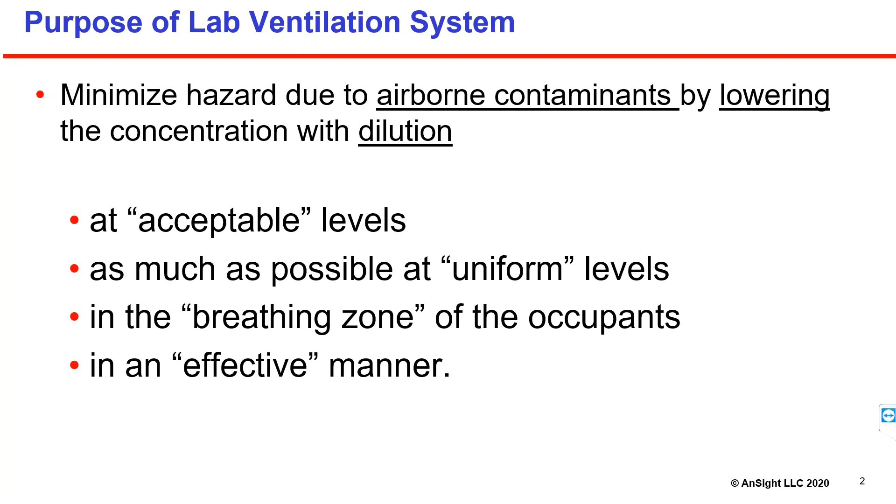So that's what I mean by effective manner. The key here is, even though this sounds very good, we really don't have any good measures to quantify this. Are we achieving the purpose of lab ventilation?

So let's go to the basics here. What is air changes per hour? You take the supply airflow rate, if you're doing in CFM, multiplied by 60. And remember, the volume of the lab comes into picture, the volume of the lab.

So if somebody says use 6 air changes for your lab, the design engineers take that 6 air changes, multiplies by the floor area and height of the space, and then finds what kind of air handler they need for this building. So when design engineers get that number, they don't think whether I need 6, 8, 4 or 3 air changes. That's what the codes and design guidelines specify, and we get that.

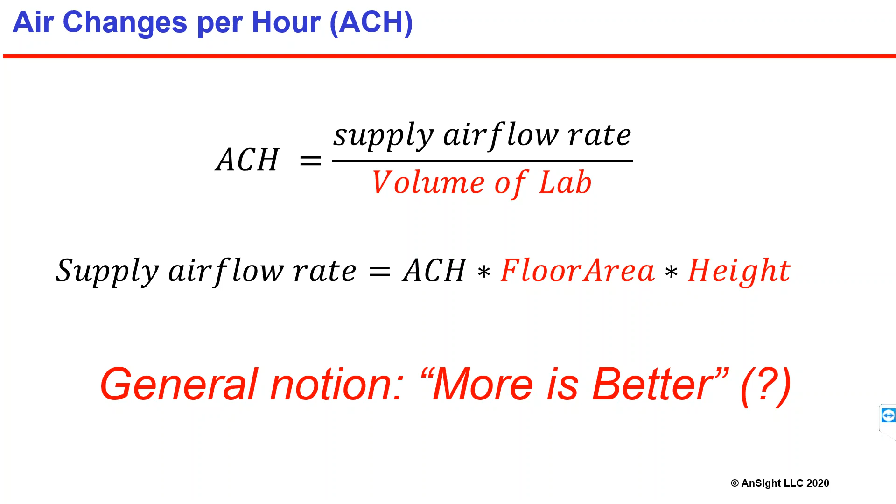So are those 6 enough? Are those 4 enough? So generally what I see around is more is better. If the code says 6, we are running our labs at 10 air changes because 10 is better than 6. Really? Let's try to find that out.

So here are some popular notions around, and what I heard from my colleagues and people I come across. High ACH can create well-mixed conditions. By the way, that air change rate equations and the dilution equations, they assume the space is well mixed. It's like you're putting a creamer in your coffee cup and stirring it well, so it's a homogeneous mixture.

Another thing, people think high ACH can create uniform concentration levels. Again, that goes to that mindset of well mixed, that if it's well mixed, then uniformly I can create similar concentration. High ACH can reduce chemical exposure risks. Again, more is better. If I put more air, more dilution, my exposure risk will be lower.

And then, not related to ACH really, but there is a notion that if I stick a sensor in my exhaust duct I can monitor the environment. I'm saying because I have a sensor, but your sensor is in the exhaust duct. We don't live in exhaust duct. Our nose is not in the exhaust duct. We live in the lab, and our critical zone is 4 to 6 feet high.

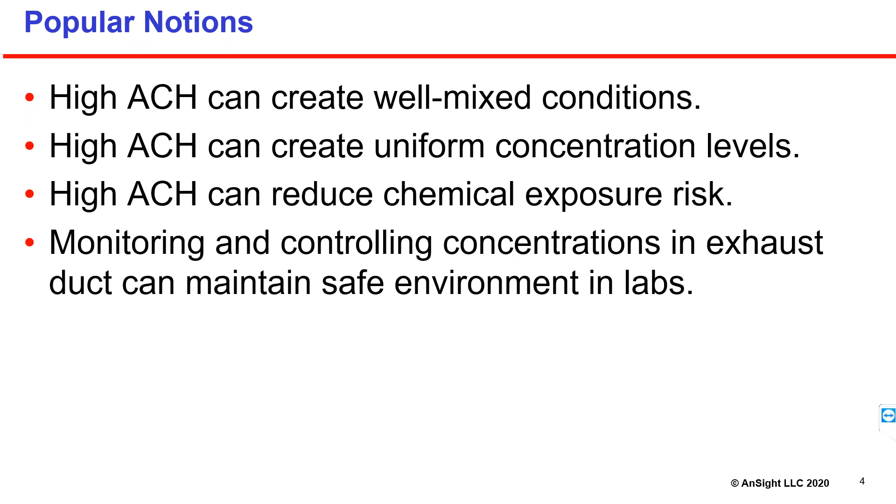Well, what are the factors that control the spread of contaminants in the space? Of course, the first thing is supply airflow rate, or you can call it air changes per hour. They are not the same thing, but they can have the same dilution effect, correct? The higher the supply airflow rate, higher air changes, it will give you a higher dilution.

By the way, only supplier flow rates control your dilution. Air change rates do not. Air change rates are required to control your purge and ramp up phase, and I will come to that. Rate of contaminant generation.

What type of contaminants are there? Where are they located? What is the rate of their generation or evaporation or something like that? Location and number and type of supply diffusers you are using, and location and number of general exhaust you have in the space.

If it is a fume hood dominated space, then how many fume hoods, what is their capacity, where they are located, and then, of course, where are the heat sources, where people are working in the lab space, and whether they are moving around and so forth.

And then finally the layout of the facility, how your furniture is laid out, where you are laying out your supply, what type of diffusers, and where your returns are. So these are different factors that can affect the spread of contaminants.

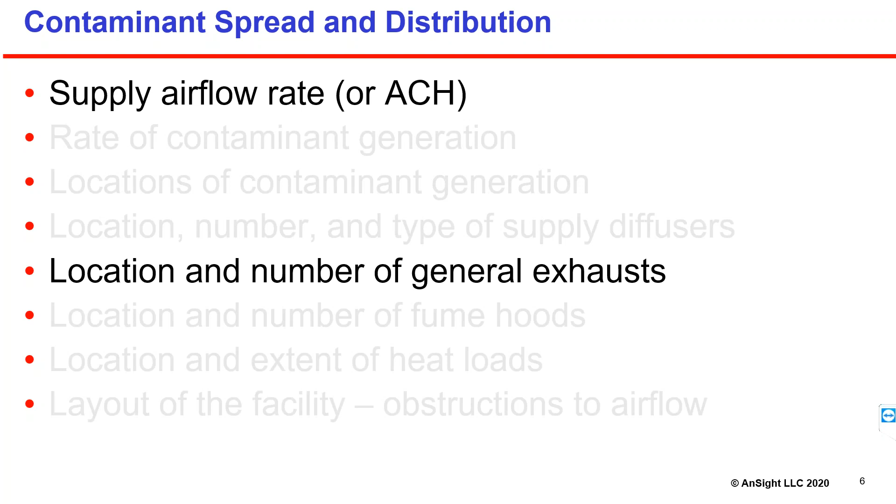What I'm going to concentrate on today are two parameters: the supply airflow rate or air change rate, and location and number of general exhausts. As I said, it's hard to quantify, and computational fluid dynamics helps us put a microscope on my lab space and look into the detail, where my concentrations are, where they are moving, how they are moving, why they are moving, and how can I compare design A versus design B versus design C.

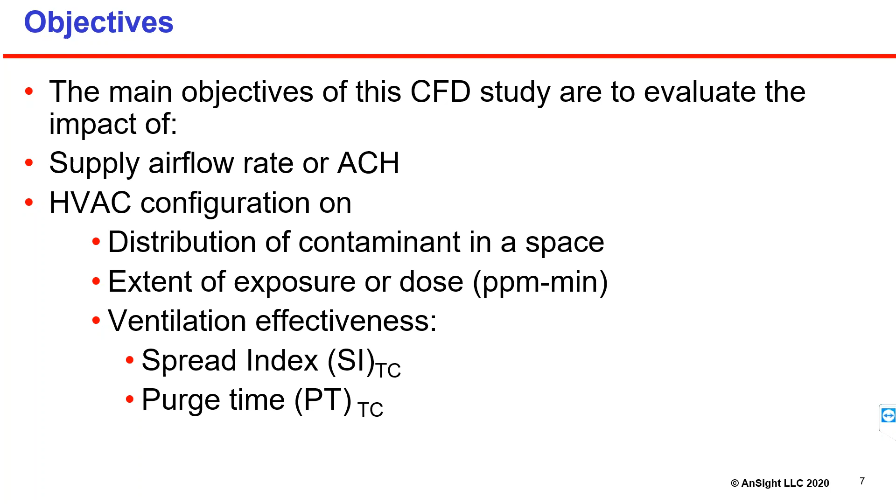I mean, all these designers and engineers can claim their lab is the safest lab. How can we quantify that? So I developed what I call the spread index and purge time, and I will talk about that. So here is the simple CFD model.

So don't look at it as, hey, my lab doesn't look like that, or I have 5 fume hoods in the lab. Those are all valid configurations. Just to prove my point, I took a simple configuration.

Think of this as a chemistry lab. There are benches here, and 3 researchers working here. Assume that somebody spilled a chemical here - this guy, person 2, did something and spilled it on the bench top.

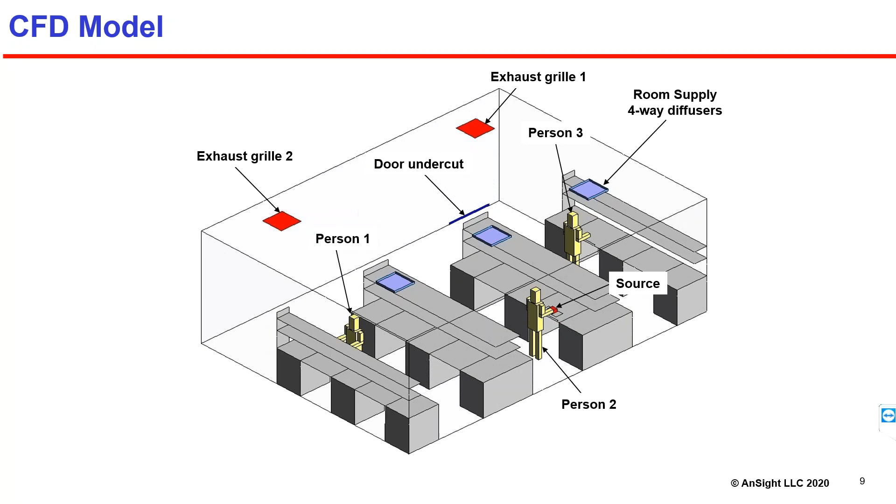For ventilation, we have 3 4-way diffusers in the lab over these working spaces, and then we have 2 exhaust grilles, as you can see here. Again, there is a door undercut, there is a door here. A simple configuration because we want to prove our point here.

This is about a 660 square foot lab. It's working at slightly negative pressure, that's why there's 100 CFM leakage bypass through the door. It's under isothermal conditions. Again, you may say, oh, what happens to the heat dominated lab?

Well, it can be different. The buoyancy can make a difference, and then your priorities will be different. If it's a heat dominated lab, you're more concerned about the thermal comfort of the occupants along with the safety of the occupants. So that's a completely different ballgame there.

Hypothetical release is 7 ml per second. Again, this is hypothetical, and let's say the whole liquid evaporates in 12 minutes, and we will run this analysis for 60 minutes. What we are going to do is run the exact same lab for 4, 6, 8, and 10 air changes and see what happens. Then I will show you 3 different configurations here.

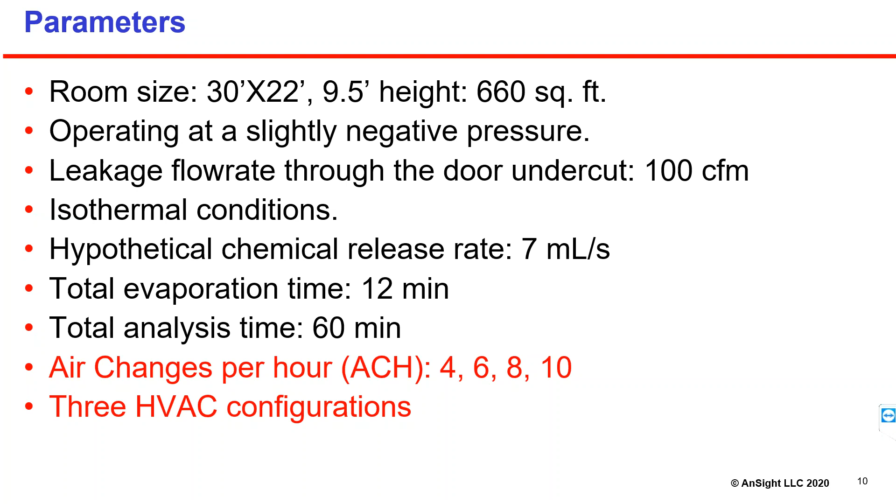First thing, airflow patterns in the space - with what is going on with COVID-19 now all over the world, there are so many things in the newspaper and LinkedIn and whatnot. Airflow pattern is the most important factor, it's the primary carrier of heat, moisture, and contaminant. So how air moves and what flow path air takes impacts the flow path of airborne contaminants.

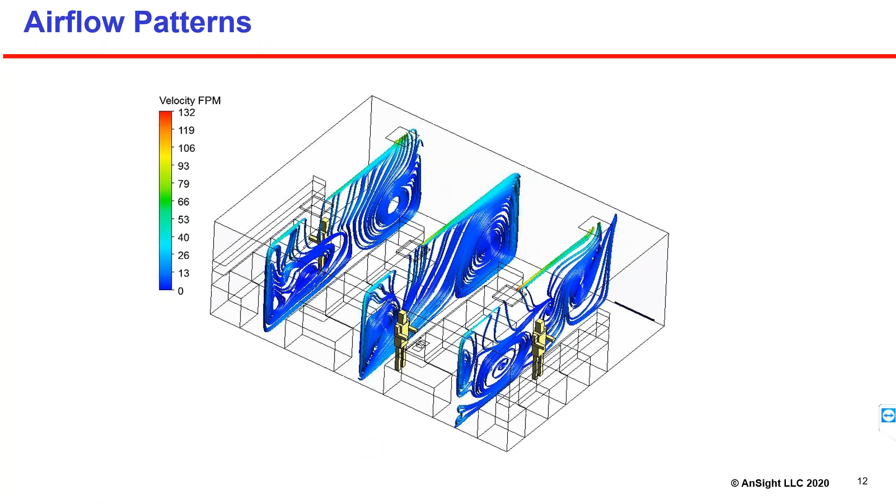Now, this is the key question. You take a snapshot in time, which I took after 12 minutes when my release of contaminant reaches its peak. And if I look at the air changes here, what you see - the first thing - is that the notion that higher air changes can create uniform concentration is a myth. It's not true at all. So no matter what you do, you will not be able to create uniform concentration in the space.

So throughout my concentration, I'm going to cap it at 25 ppm. It's arbitrary - assume 25 ppm is our acceptable concentration level. Again, that's arbitrary, you can have 5 ppm, or 10 or 50, whatever.

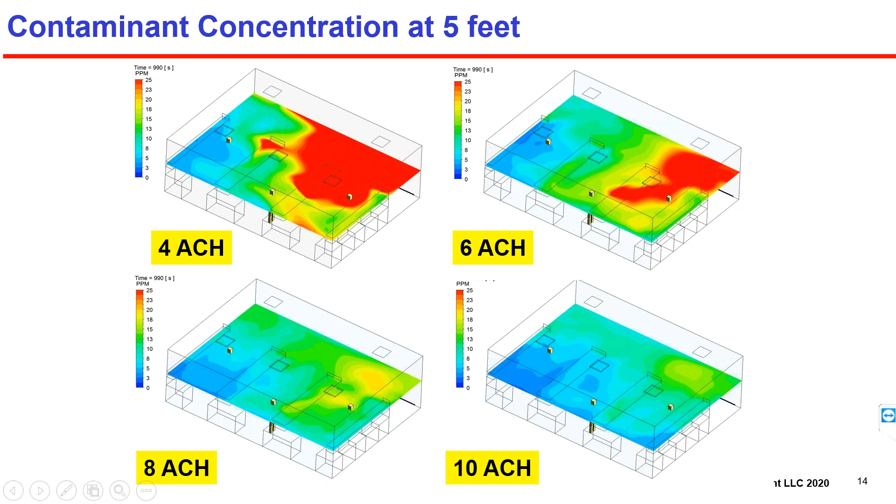So if we animate this and look at how it spreads with time, from the time of release until it fully evaporates, this spread is always smaller compared to this - this room with 10 air changes is purging much faster than the 4 air changes. When you will get full blue color, we are still at the yellow or green color here. So air change rates affect the rate of purge. That's a very important thing to note.

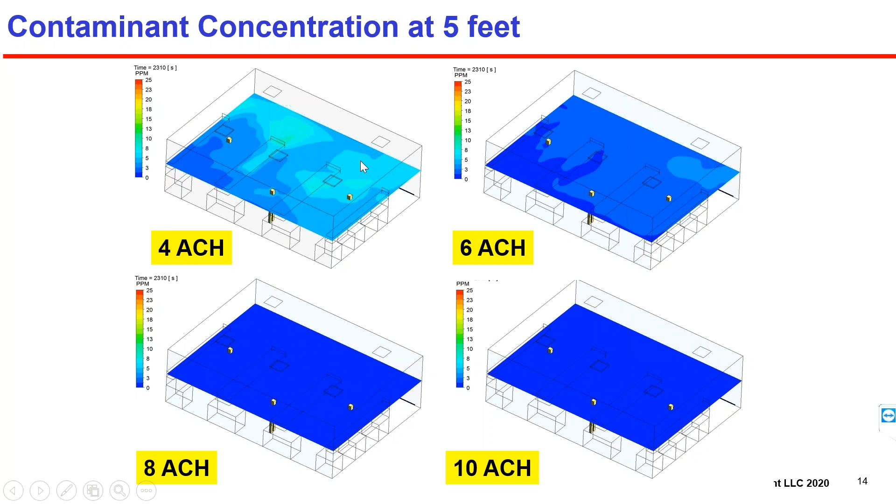Supply flow rate directly affects the dilution. You can see now this is completely blue, and we still have the shades of green and light blue there.

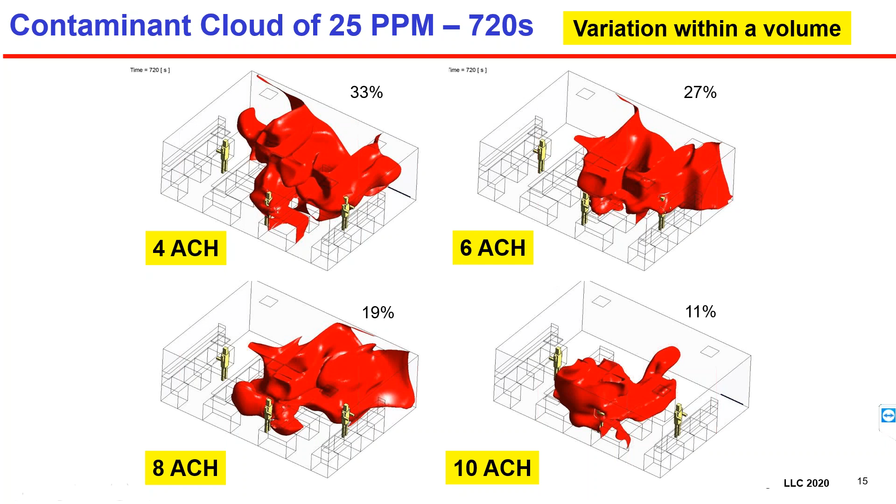So there's significant reduction when you go from 4 to 10. And this reduction, you will see, gradually diminishes, so you may not see a big difference between 8 and 10.

We can animate this to show actual propagation of this high concentration zone in the lab space. This is not possible to visualize by any other means than computational fluid dynamics. That's the beauty of CFD. This is a science based on the conservation of mass, momentum, and other equations.

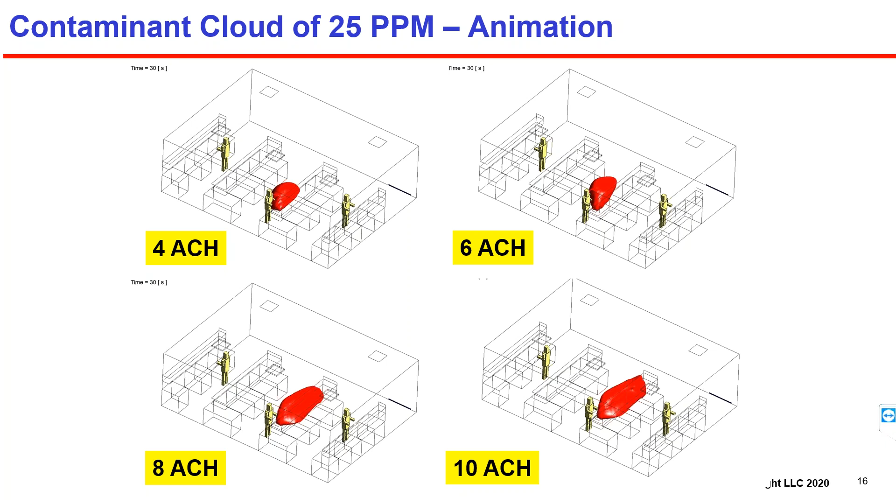If you watch that, this takes a long time to purge. When you have the contaminants kind of trapped between the benches, that is the last spot to clean. Air cannot reach effectively between those spaces, between those cabinets, or between the beams if you have them. Those will be the last spaces to purge.

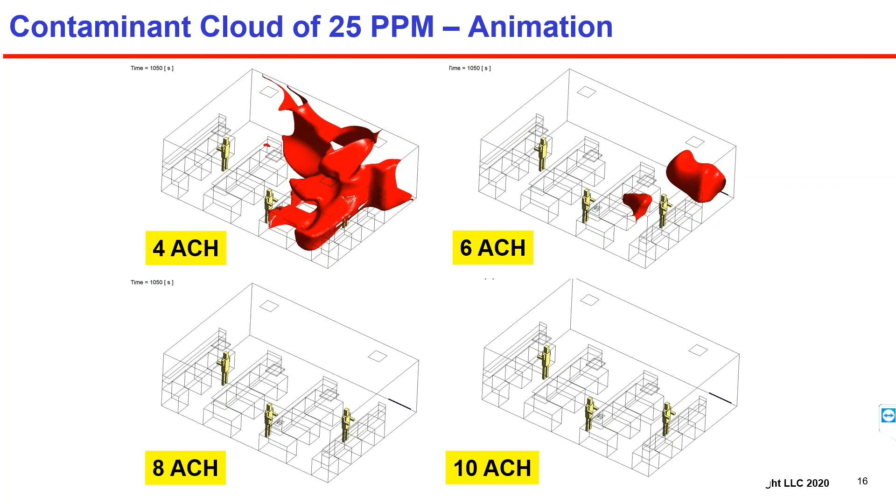So more open cabinetry you have, it's better. If you create a lot of compartments and zones which are trapped, contaminants go there and they will be last to remove. Again, you see this has already gone out from there, and this is still going through that.

Now let's understand the chemical exposure here. Just the absolute concentration is not important — it's how long a person is exposed to that concentration.

What you're seeing on this is time versus the concentration. I placed the sensors in front of their noses here, so each sensor is in front of their face, allowing me to monitor the concentration over time.

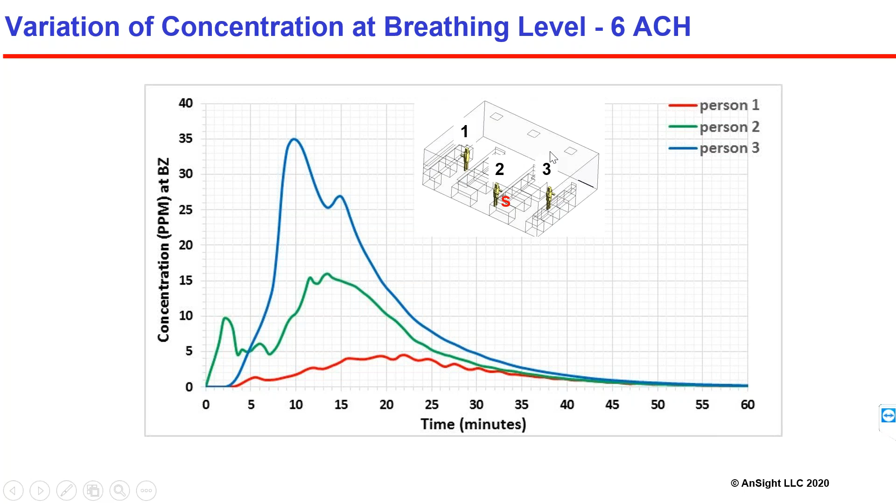What is interesting here is person 3, who is away from the source from person 2, shows the highest concentration exposure. Then comes person 2, and then person 1, who is in this position here. This air is trained to move along this side, as you saw in the animations.

If we convert that into the exposure, that's the area under that curve, or a ppm-minute kind of unit, you will see that person 3 has a much higher level of exposure, who is not even close to the source of release.

And again, I want to make a reference to what's going on in this pandemic — not related to droplet, but to aerosol. If somebody is asymptomatic and is breathing the germs out, the person sitting next to them may not be the one who gets the higher exposure. It may be someone else, and that will depend on what kind of airflow patterns you have.

So you can see that person 2 is the next highest, and person 1, of course, has the least exposure.

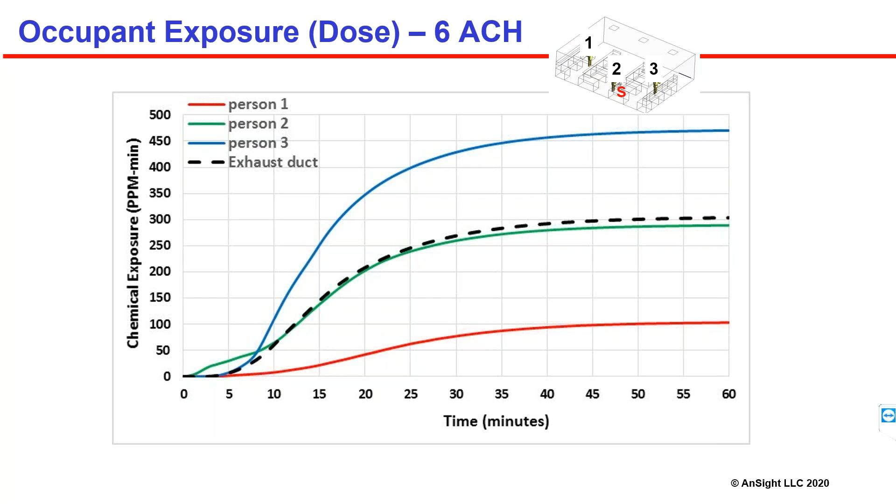Under-prediction is the most concerning here. If you think everyone is safe using this dotted curve, that's not true. Again, I'm not against putting the sensor in the exhaust duct — that can act as a smoke detector. If there is a spill, it will trigger the alarm, but it's not necessarily a monitoring device, it's a detector. We have to keep that in mind.

Where you really see the effect of air change rate, as I said, is during the purge cycle, where you reach the peak and now you are purging the lab, cleaning the lab. You will see that higher the air change rates, it purges faster than the lower air change rate. So definitely they stack up very well in the purge cycle, but not when the active generation is there.

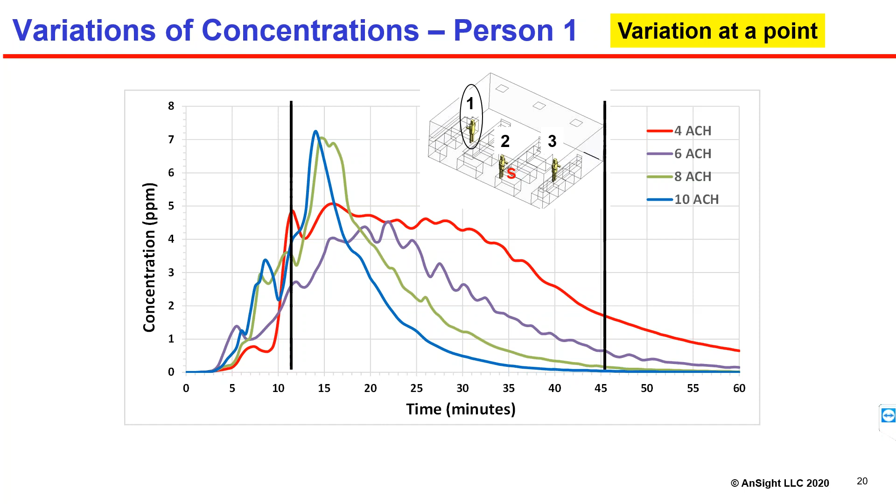So you can take this for the fugitive emissions, or other gas leaks, or an accidental spill. And what it also tells you is how long you should take to get the people out from the lab when there is an accidental spill, and what kind of exposure they will get if they are delayed to evacuate. So you will see, if you are going to take 5 to 10 minutes to get all the people out from the lab, at higher air changes, you will expose them to higher level of concentration.

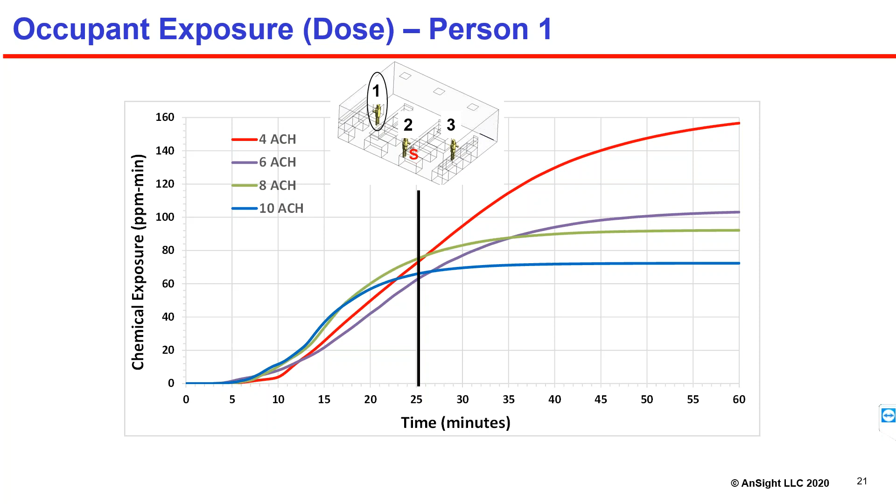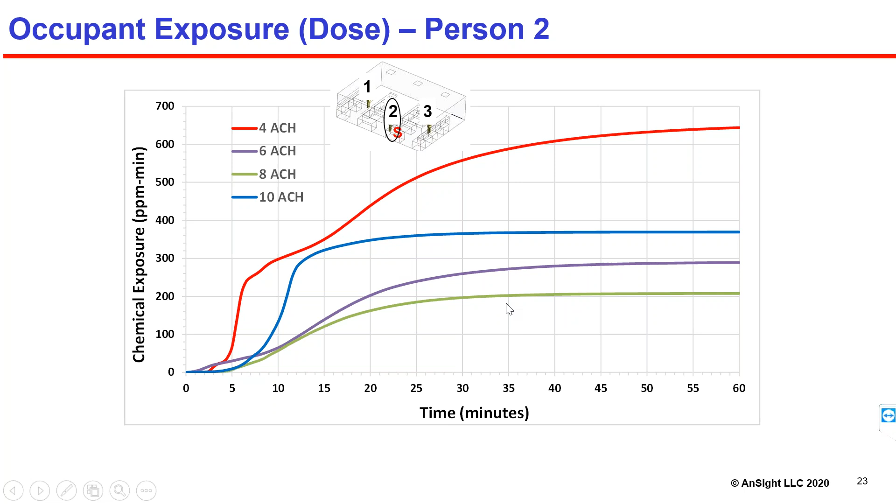This is for person 2, more or less the same story. You can see these peaks popping up here and there, and this is the 10 air change rate. So if we look at the exposure for person 2, who is close to that spill, the 4 is highest here, but it is not stacking up in this order. 10 is the next one. I was expecting 6 and 8 and then 10, but 10 is not the lowest one.

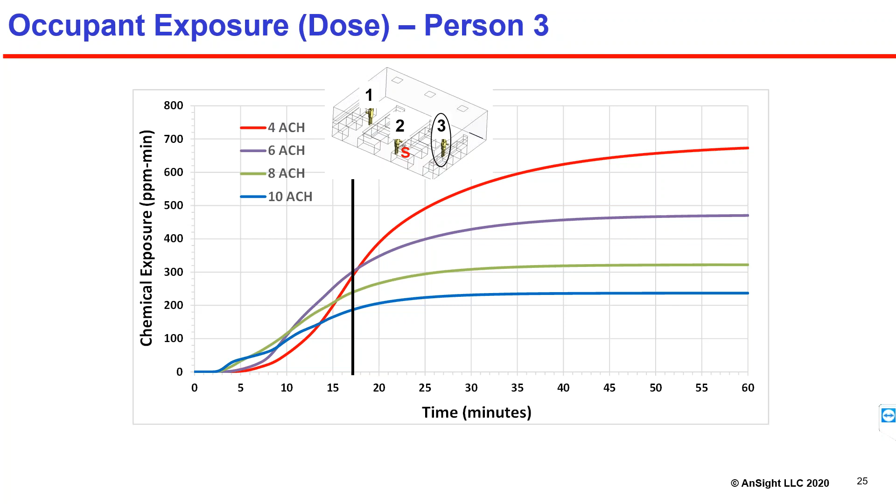By 10 minutes or 15 minutes, people are already leaving the lab because of the spill. They left this empty lab. Really, exposure is secondary then - I don't care what the exposure level in the empty lab is, since there's nobody, no occupant there. What it will help you with is how soon you want people to get back to work in the lab - higher the air change rates, you will purge the lab quickly.

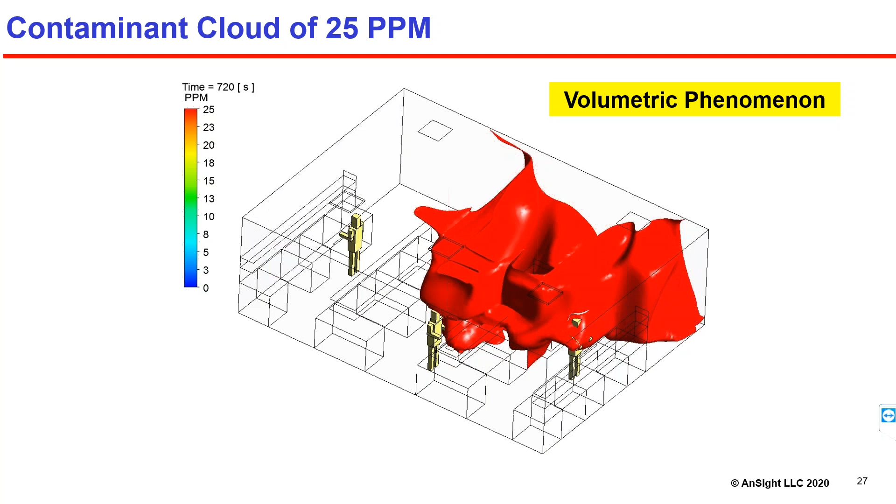Okay, here is the ventilation effectiveness measure I developed. So our goal is to minimize this blob. Remember, this blob is the cloud under which the room is not at an acceptable level of concentration. So we can quantify this - we can take the volume of this blob and divide it by the volume of the room.

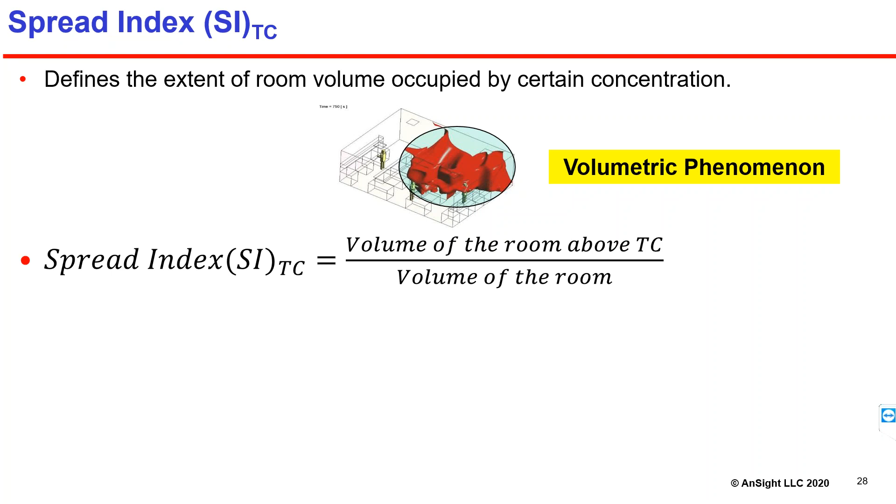As I told you, this is only possible with CFD. You cannot do this otherwise - even if you bring a million sensors into your lab, you will not be able to quantify that. And remember, this is a volumetric phenomenon. It's not a one-point detection like an exhaust, or just the breathing zone thing - it is how it is spreading in the entire lab.

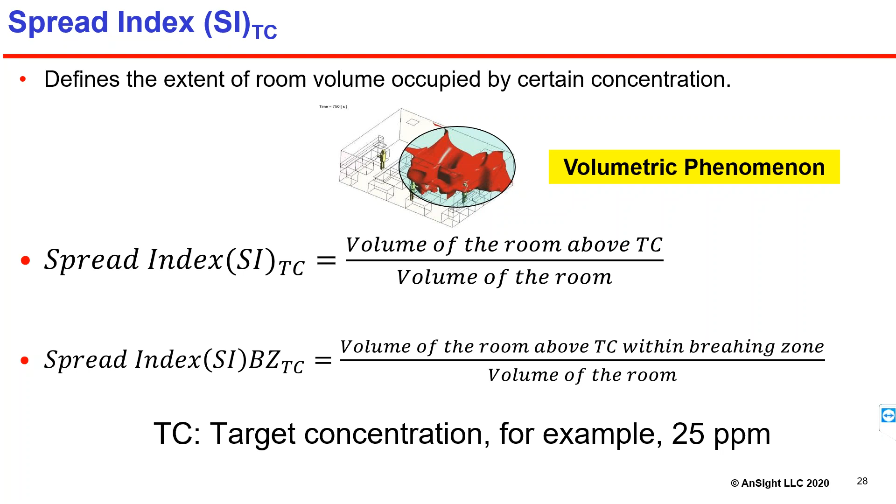And if you are more concerned about the breathing zone, we can do the same calculation for the breathing zone. So our target in this example is 25 ppm, but if your target concentration is 5 ppm, you can calculate the spread index for 5 ppm. You can calculate the spread index for different chemicals used in the lab, and use different levels of acceptance to find what is happening. So it's not just one spread index - the spread index can depend on the type of chemical and your target concentration for that vapor in the lab. You can do this analysis for various concentrations, and of course at the breathing zone.

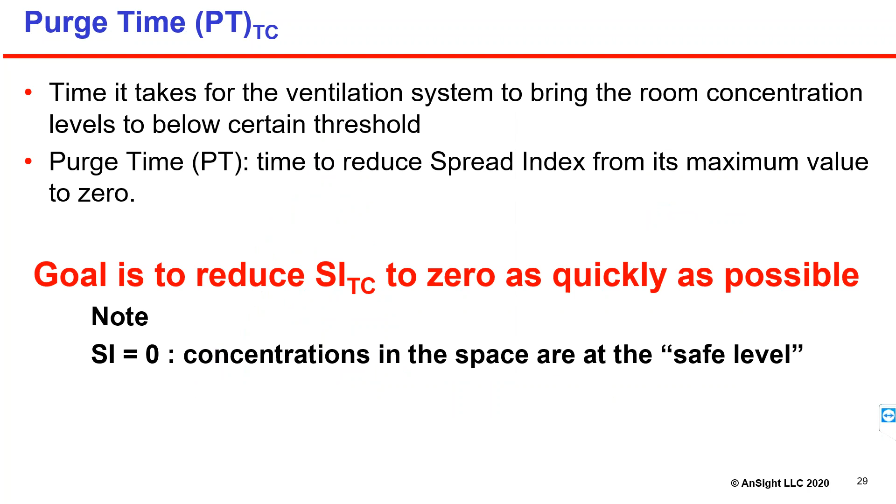The purge time is the time it takes to bring the lab concentration to an acceptable level. Remember, when your spread index is 0, it does not mean your lab is clean - it simply tells you that the contaminant concentration in your lab is at a safe level. It doesn't mean it's 0, just that it's at a safe level. And that safe level can be different for different chemicals, different labs, different applications, and so forth. Our goal here is to minimize this SI to 0 as quickly as possible - that's where the purge time comes in.

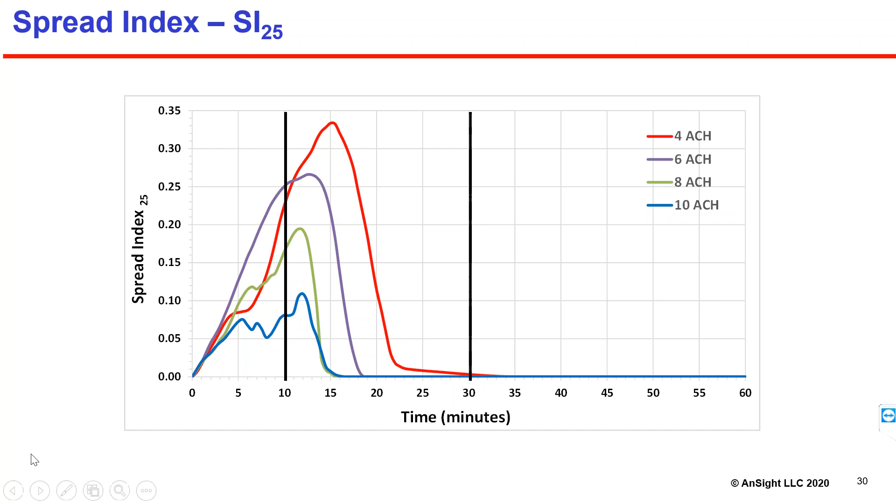Now, if you look at the purge time it takes, 4 air changes will take about 20 minutes to purge. For 6, it's about 7.5 minutes. But for 8 and 10, it's almost similar, about 5 minutes. So why, if your goal is to purge the lab, for example in demand control ventilation, would you design your air handler for 10 air changes when there is little difference between how long it takes for 8 and 10 air changes?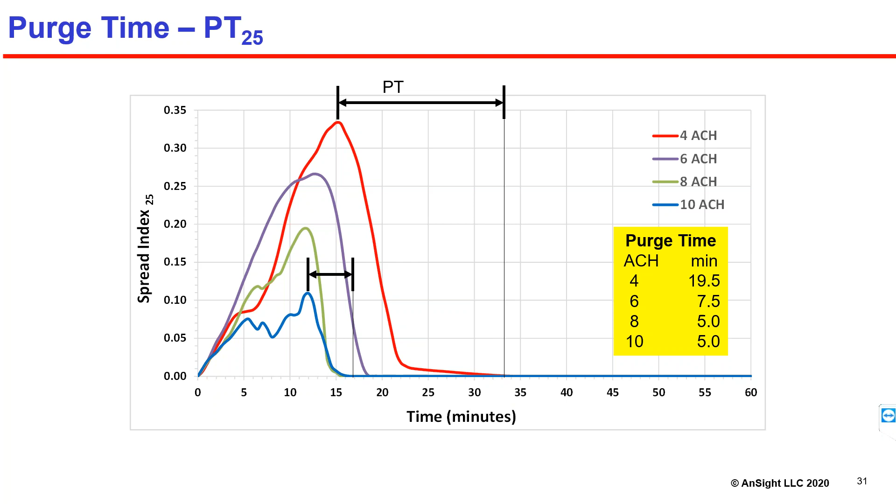So it shows that you start getting the diminishing returns as you start increasing the air change rate. And I'm not the first one to tell you this, you already know that.

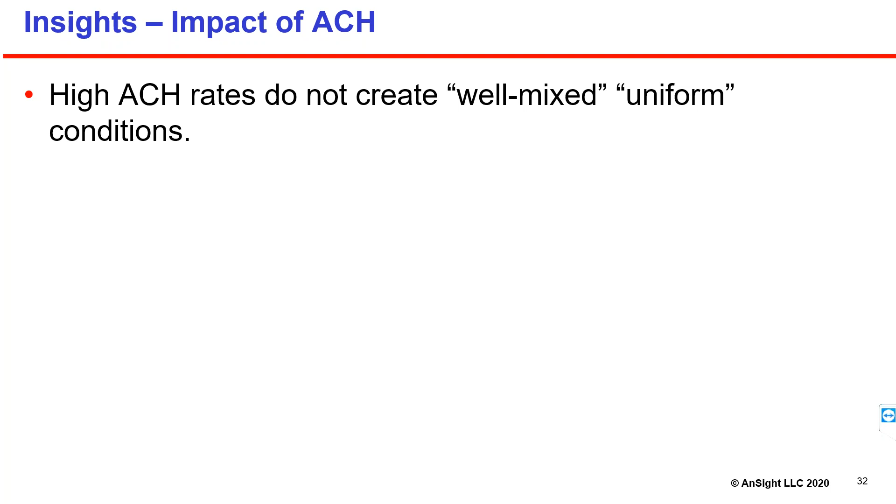What we learned from this first exercise: high air changes do not necessarily create well-mixed uniform conditions. Exposure level depends on the location of occupants, where they are located. High air changes do not ensure low exposure for all occupants. Remember that - you can reach that peak pretty quickly and give a high exposure dose to some occupants. Higher change rates do not necessarily purge the rooms more effectively than lower air changes.

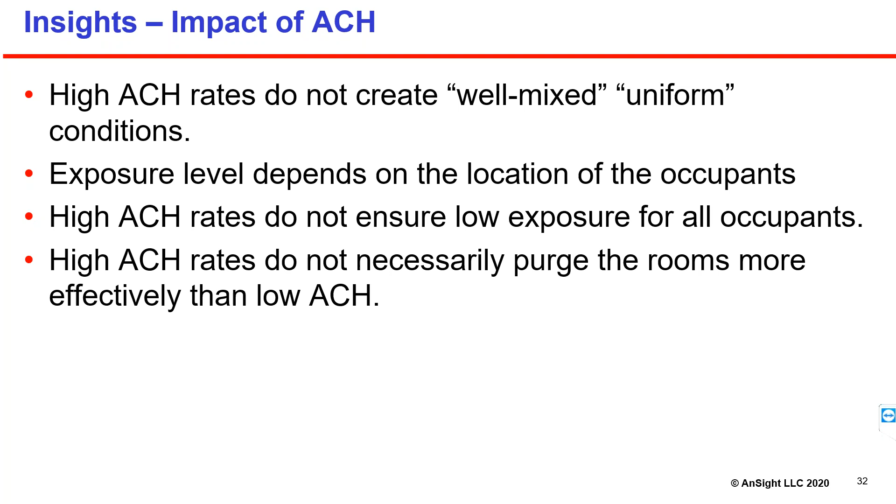What I mean is, when you have trapped volumes of the gases, then it doesn't matter whether high or low, it will take its time to clean that space. Impact of high ACH is realized only during the decay phase. Okay, that's what I said.

Now let's look at the configuration here, and let me do a little time check here. Okay, we are good. So let's think about this lab, exactly the same lab.

We are running at 6 air changes. The only difference we are going to make is add one more exhaust grill. And I was talking to my design engineer, a friend, and said, hey, tell me approximate cost. He said $500 installed for one more exhaust grill. Now, again, I want to make a reference to the COVID situation here as we are reopening and getting into the spaces.

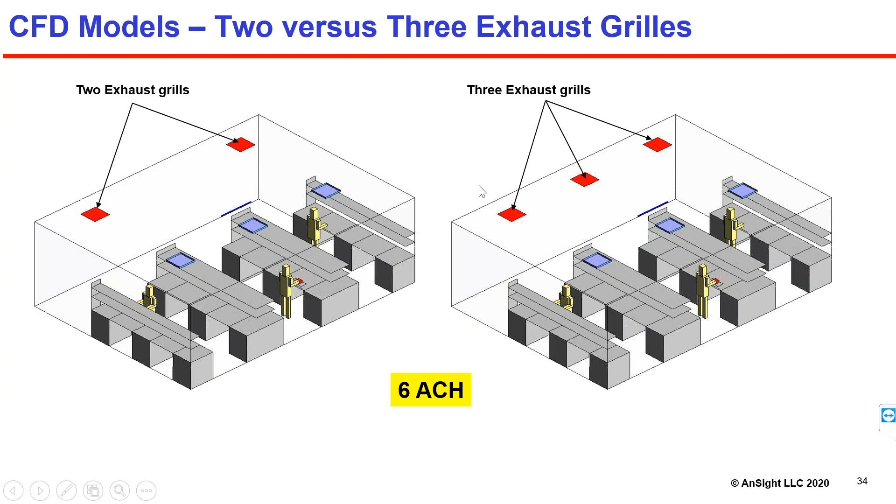Where the exhaust grills are and how many exhaust grills, that will make a big difference. And I will show it to you shortly. So that's the only difference: one has 2 exhaust grills, another has 3 exhaust grills. Exactly identical generation rate, same air changes.

Remember, they will purge at the same rate because I'm not changing the air changes - they are both at 6 air changes. So the only thing that affects your purge time is the air changes, not where you place your exhaust grills and so forth. This is a quantifying thing.

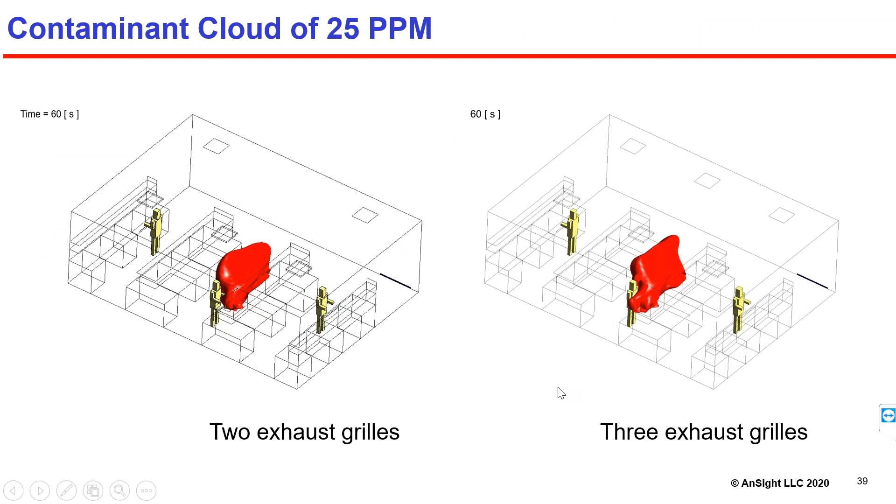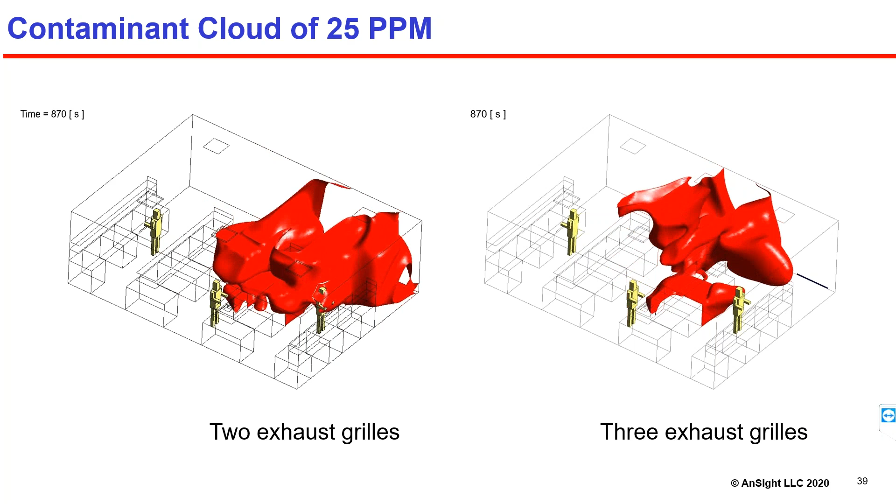Remember, this guy's face is completely immersed in that dirty cloud, if you will. We took that guy out from here and it reduced to that. Look at the animation here. This is very compelling to see that just adding that $500 grill helped contain that red blob in a narrower space than just with the 2 grills here.

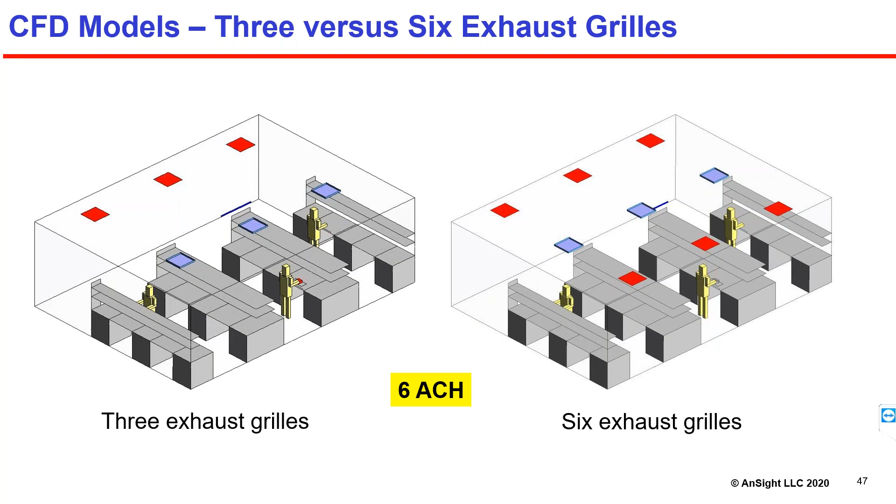Now, people say, well, more is always better. If 3 make that difference, what about 6? We can put 6 grills, move the supply diffusers at the center. Let's look at what is happening. It's doing it worse. It's making it worse, okay? You should not draw the contaminants where the occupants are.

Very simple principle. Again, I want to make reference to the COVID situation. We should not pull the contaminants towards the people. We should pull it away from the occupants.

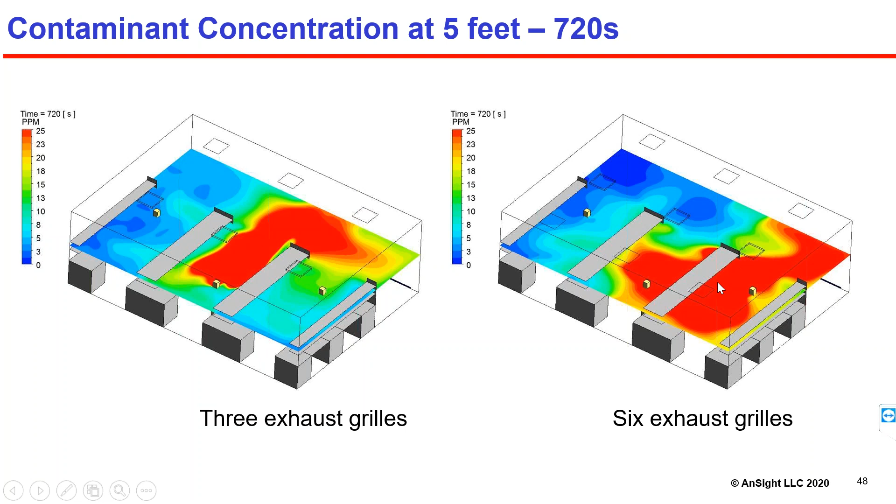So when you added 3 more on this side, so there are 6 grills here, you see this has spread even more. Look at the animation. It takes some time to pick up because we have the ready exhaust there. But once it starts building up, it starts spreading more because that pool of contaminants is saying, hey, there is one more exit for me to get out from there. But whatever that configuration is, that's not allowing that ready path for the contaminants to get out.

Now, this is not just a combination of 3 versus 6. It is how the lab is laid out, where the diffusers are, what kind of diffusers they are, and there are a variety of other configurations and factors.

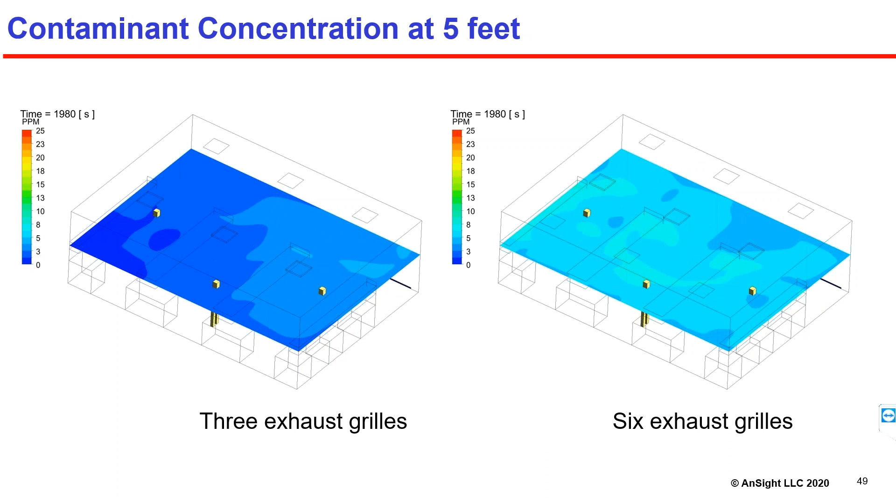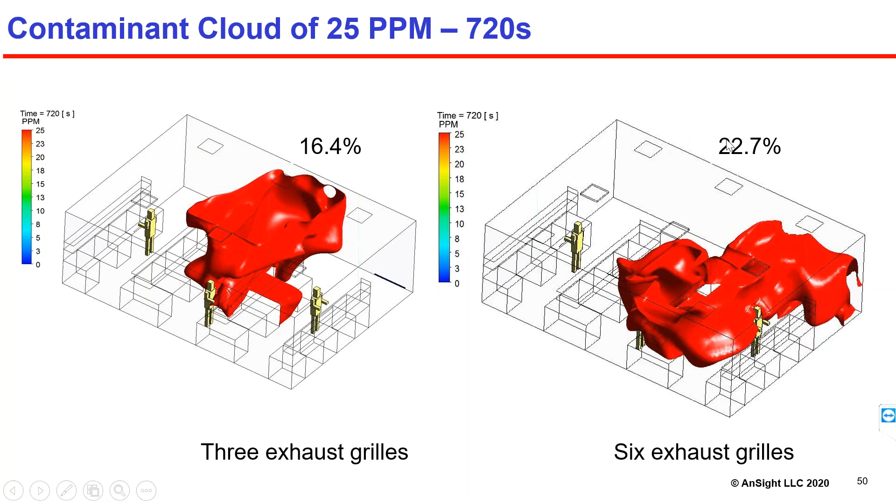So you can see here again that red blob, it has spread quite a bit in the lab, compared to 16%, now 23% here. What about breathing zone? It's even worse, from 3% to 16%. And look at their faces - completely immersed in that red blob compared to here.

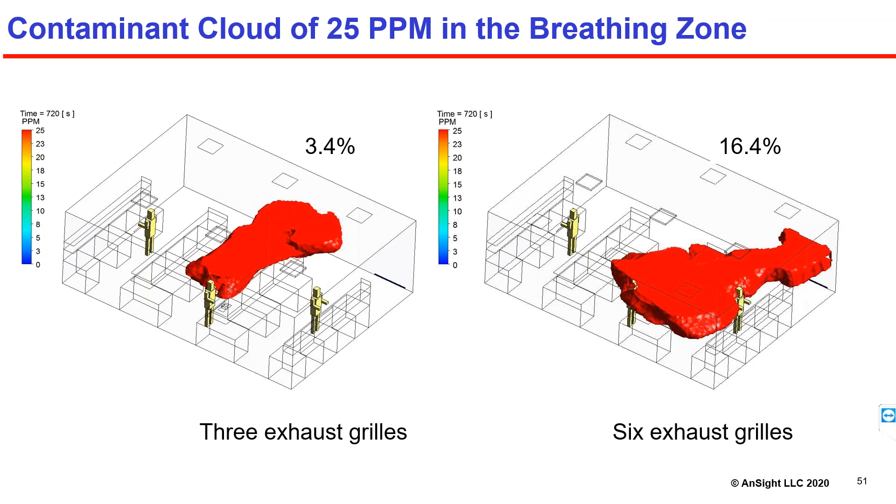Again, this should be done at a design stage, if possible, at a schematic level - when you decide your furniture, when you decide what kind of chemicals will be used, what kind of lab it is, how you are using the lab and so forth. So what is your practice? And put that together to find the optimum air change rates and optimum configuration for the lab.

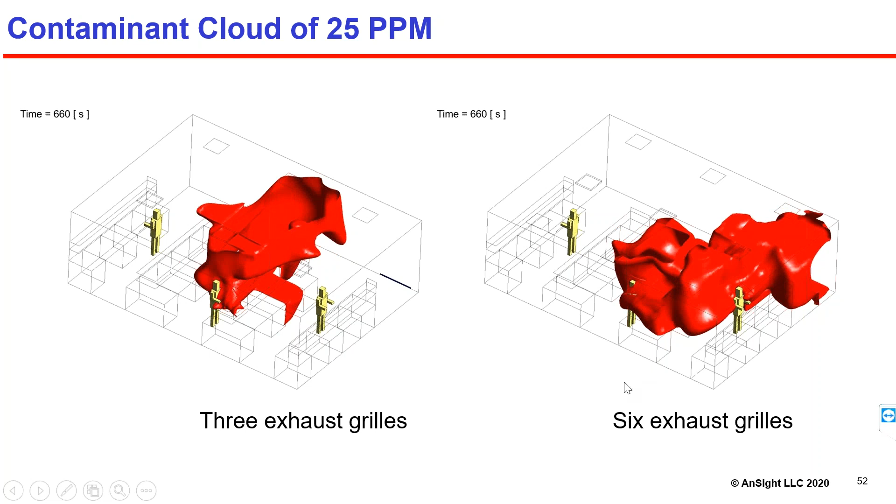Again, look at this animation here. You can see how it is retaining near that central aisle versus here it is spreading in most of the lab zone there. So chemical exposure analysis completely reversed now - dotted line is the three grills, and solid line is 6 grills. 6 grills are making it worse because we are pulling the contaminants towards the occupants. Same thing with person 2, same thing with person 3.

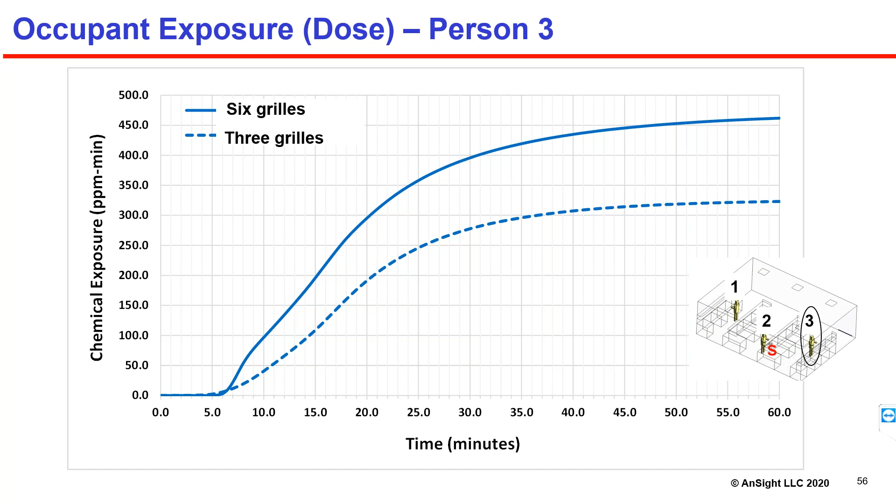Again, you may ask, well, the location is not fixed - person 3 can be anywhere. Yeah, this is just, instead of having nothing, at least this gives you a starting point to understand. Remember that spread index is giving you a fair comparison between design A versus B versus C versus D. Which one is good? Which one is the best? And you don't know - you can, there may be just hand waving, oh maybe like this, maybe like that, oh because this is good. And intuitively you will think, oh, if 3 is good, then 6 must be better or best. And that's not the case unless you do that analysis.

So ventilation effectiveness, again, the same story here.

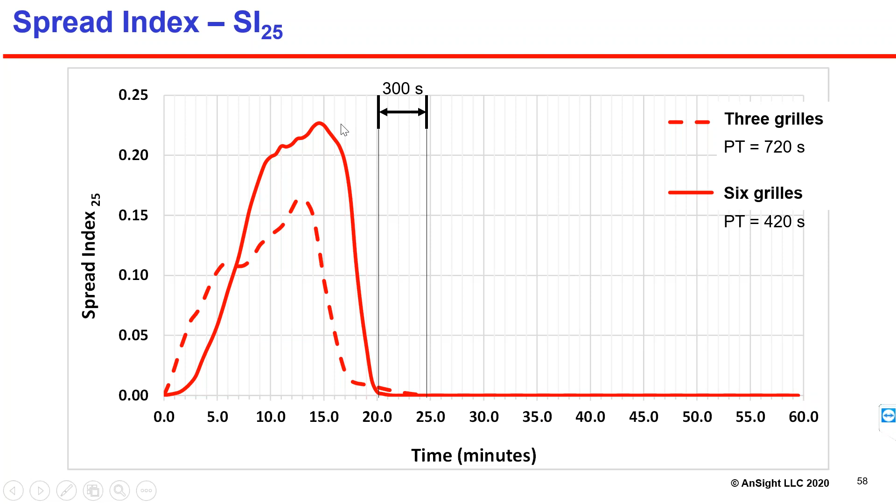Unfortunately, you can see 6 grills spread it more. So to summarize what we have learned today, high air changes alone cannot make labs safe. Don't just simply increase the air changes. Don't just think that 10 is better than 6. It may not be, depending on the purpose of your lab and what you're doing, whether it's an accidental spill, a fugitive emission, a gas leak, and what you're trying to achieve. So the blanket statement saying that higher air changes will always make my lab safe is not true.

Configuration matters. As I showed you, location and number of exhaust grills matter. Place exhaust grills away from the occupants as much as possible. Don't try to pull the contaminants where the occupants are.

I was designing a smoke evaluation for the smoke exhaust system, and generally architects don't like to see the dirty grills in their space. I don't blame them, they're not very pretty looking. So they just put the linear diffuser, linear grills on the perimeter.

This is like a 3-story space, with a balcony and circulation space. And they pull the smoke towards the people, along the path they will take when there is smoke, and that's where they will find their stairwell. If you do that simply for an aesthetic point of view, you're putting people's health at risk.

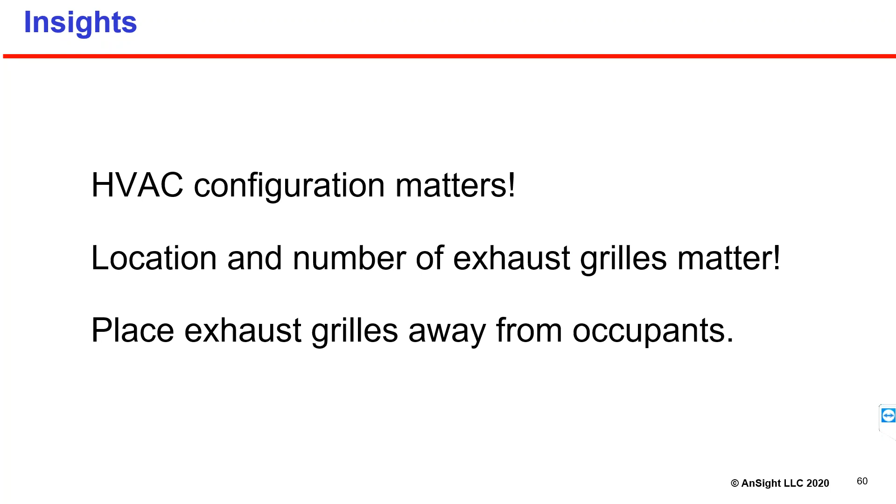So when you put that at the center, because smoke rises up, it readily gets out of the space without spreading. So placement and number of exhaust grills is quite important. Just following the codes and standards is not enough.

This is my favorite, I'm passionate about this nowadays. You talk to an engineer or contractor and they say, oh, we are following the code, we are following the building code, we are following the standards. Who is writing the code? Who is writing the standard? You and me are writing the standard.

And how are we developing our code? It's simply by yea or nay. 10 people sit there: who is in favor of 6, raise your hand. Who is in favor of 10, raise your hand. And whoever gets the majority vote, that goes in the code. Is that a very scientific way?

And then we always forget the codes and standards are minimum requirements. Show me one code, show me one standard in the world that tells you if you follow these instructions, if you follow these guidelines, people will be safe. Based on experienced engineers and professionals, they get to that point, I don't blame them, don't take me wrong. We should have codes, we should have standards, but don't take codes and standards as the final word.

It's not. And they are not necessarily designed to make the labs or spaces safe, healthy, and productive. That is our responsibility. If you have a passion and compassion for the people working in your lab, you need to take that extra step and extra due diligence to make sure that whatever you're designing is going to safeguard the lab and meet the purpose of the ventilation.

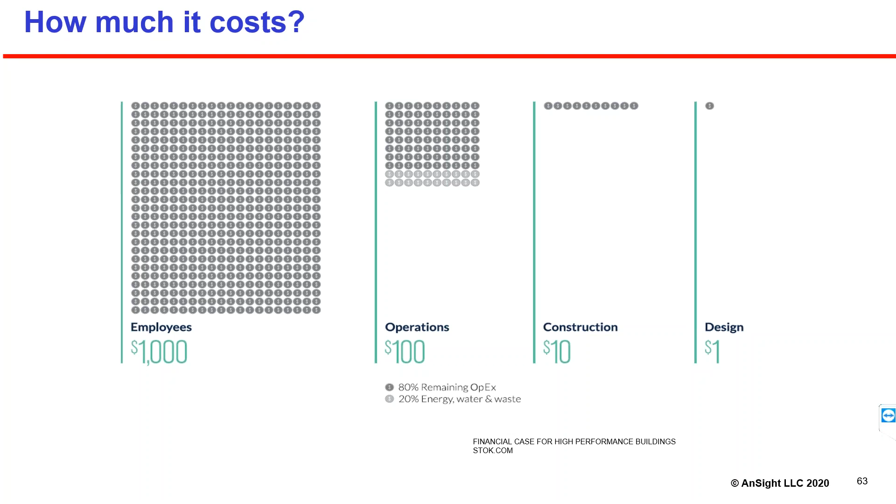The only time we know is when we get that phone call from the owner. And I'm sure nobody wants to get that phone call. So how much does CFD cost? It's 10 cents. Those 10 cents are going to give you extra due diligence, extra peace of mind, if you will. And remember, that's the passion, that's the compassion that we are making people safe in the lab.

Did you study return grills at the bottom of walls? I did, but not to this extent, not in a time-varying fashion. I did try to play with it and did not find it as promising as the ceiling grill. I'm not prepared to say definitively whether the low wall return or ceiling return is better — it's very situation specific. For this case, it did not show much promise compared to the ceiling grill.

I guess it might depend on what the prominent chemicals are in the lab — whether it's something heavier than air that pools at the floor, as opposed to something else. Yeah, that's part of it. But the diffuser location, supply flow rate, throw, and type of diffuser will also make a difference. This setup was promoting very high mixing.

I don't mean to bring up COVID, but our spaces are basically designed for mixing ventilation. If you go to the ASHRAE handbooks, theories, ADPI, PMV, PPD and so on, they promote mixing because we want to mix the ventilation air with the room air as effectively as possible. But that tends to mix the contaminants too — we have to keep that in mind.

So whether low wall return is always good, or ceiling return is always good, or four-way diffusers are better than laminar diffusers — we don't know. It's very situation specific, because the bench layout differs from case to case. It's not just how the air moves, but the obstruction to airflow matters most. If you have a huge freezer in the middle, it creates different airflow patterns, and that will make a difference.

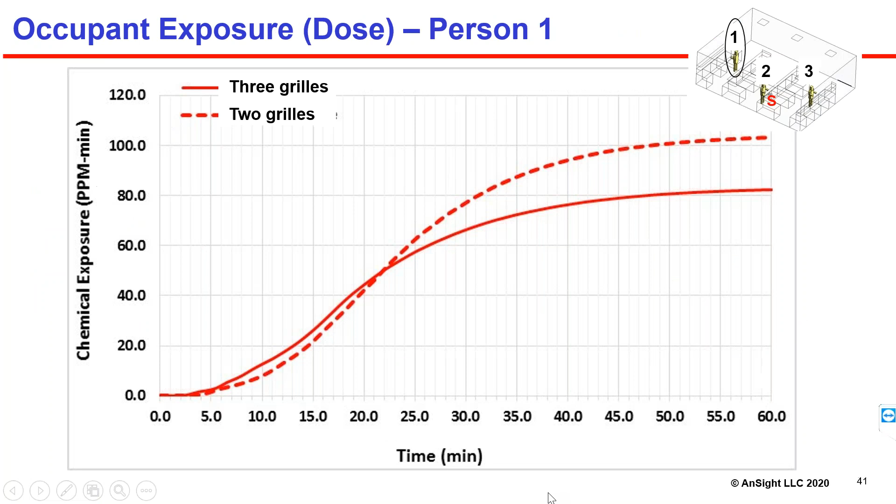So CFD analysts love to produce color pictures. Yeah, I think we've got time for maybe one or two more. And I think a few questions are getting into some specifics that I think you've answered a little bit, that getting into the weeds maybe isn't the narrative here.

But placing exhaust grills away from occupants, so the 3-grill configuration shown draws the contaminants into the exit circulation path for P1 and P2. Wouldn't it be better to put them on the other side to protect the circulation path and avoid smoke in the exit corridors? And I think the key here is just knowing that smoke wasn't modeled, right? This was chemicals in the air, not necessarily smoke modeling. So I just want to make sure everybody's aware of that.

Yeah, and the corridor isn't coming into the picture. We have the negative pressurization, correct? Yeah, so we are bringing 100. So I think maybe the question is that it's drawing it into at least the exit path for that lab. Is that a concern, or is the idea that you'll be exposed to it for some small amount of time, and the time it takes to walk out of the lab is probably relatively minimal? Oh, I get it now.

Excellent question. So yeah, maybe this will tell you where to place the door, or maybe that placement of that 3rd grill near the door was not right. Yeah, absolutely. We can find another place for that grill, or just make 2 grills large enough. Don't just stick with 2x2, make it 2x4, and instead of 3, just put 2. That's a possibility, correct? Yeah.